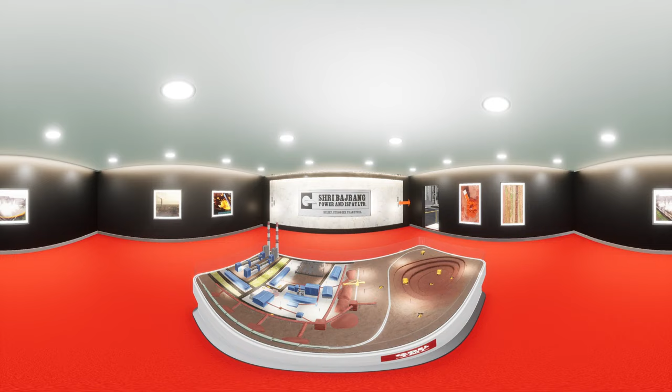Welcome to the world of Goel Group. We believe in the power of quality and strive in providing only the best quality TMT rebars for our customers.

We tap only the best raw materials for the production of our steel. Iron ore and other raw materials like coal and dolomites are taken for quality check before they are used for production. The plant has its own railway siding facility, enabling timely movement of raw material at cheaper cost.

The properties of the iron ore are refined and improved by removing any gangue minerals and contaminants from the mined ore in our beneficiation plant. The ores are then crushed, washed and taken to the pelletization unit.

Moving ahead, our sponge iron facility with a capacity of 1700 metric tons per day has been installed, keeping in mind our current capacity of steel making with room for future expansion for subsequently rolling capacities. The sponge iron from here is taken for a final chemical analysis before we move it to our steel melting furnaces.

We would now like to invite you to our TMT rolling mill factory, where you would be able to walk through and experience our entire rolling process.

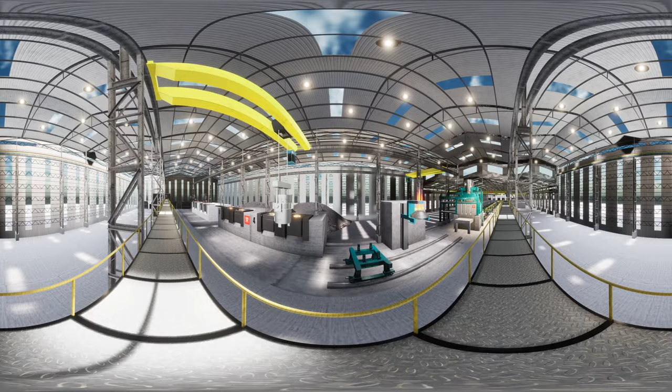Ladle refining furnaces, or LRF, is a steel melting technology used to remove impurities such as sulfur and phosphorus from the molten metal. Once refined, samples are sent to our lab for a chemical analysis. Only batches that have been tested and approved get to proceed ahead.

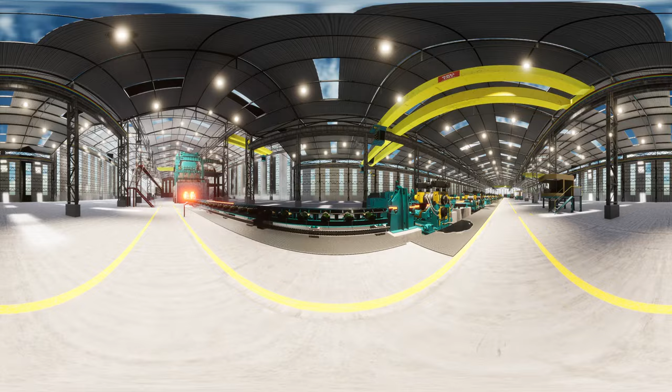The rolling mill is a fully automatic 18-stand straight mill which rolls world-class quality TMT bars at high speed. Equipped with automated loopers, it helps in maintaining the section weight of the TMT bars and ensures that each bar is of uniform weight.

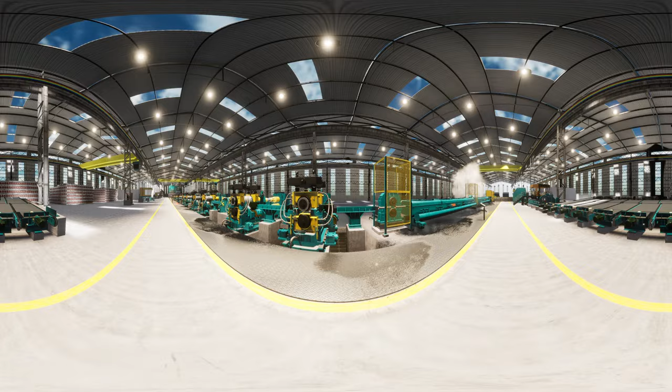The temperature of the rebar is checked at this stage to ensure it is within the rolling parameter we have set.

Using the Thermex process, a short, intensive but very precise inline quenching is carried out, resulting in rapid cooling and hardening of the periphery while keeping the core of the rebar still hot.

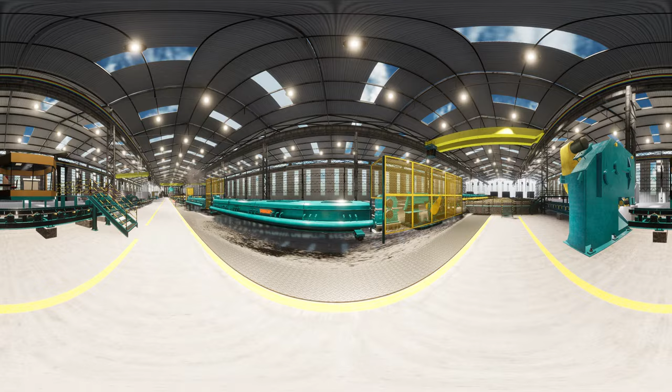On further cooling of the bar in ambient temperature, a thermal exchange occurs between the hot core and cooled outer surface, resulting in high strength, high ductility and excellent bend properties of the rebars.

The rebars would be cut to length using a hydraulic operated cold shear to ensure perfect cutting length. The rebars would then be checked for straightness and tied in bundles as per requirement and specification.

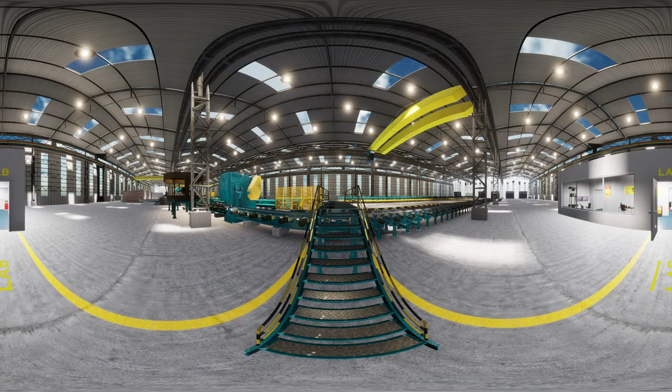You have now gone through the step-by-step process of rebar manufacturing. However, these rebars are not yet ready for dispatch. For that, samples from each batch would need to go through a set of rigorous chemical and mechanical tests to check their quality. Please proceed to our in-house state-of-the-art lab to witness our latest batch being tested.

Bend testing allows us to determine the bend strength, resistance to fracture, fracture strength, and ductility of the rebars.

Tensile testing, also known as tension testing, is a fundamental material science and engineering test in which our rebar is subjected to a controlled tension until failure.

Using cutting-edge spectrometer systems, spectrograph tests are carried out here to determine the chemical composition of each test sample.